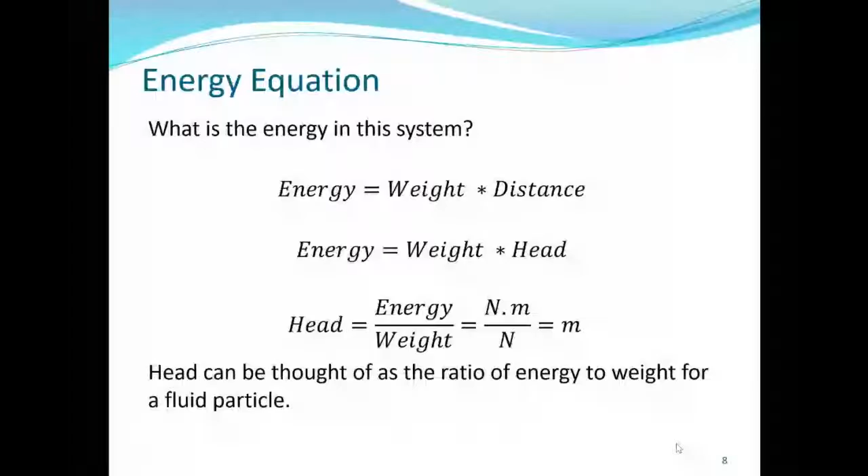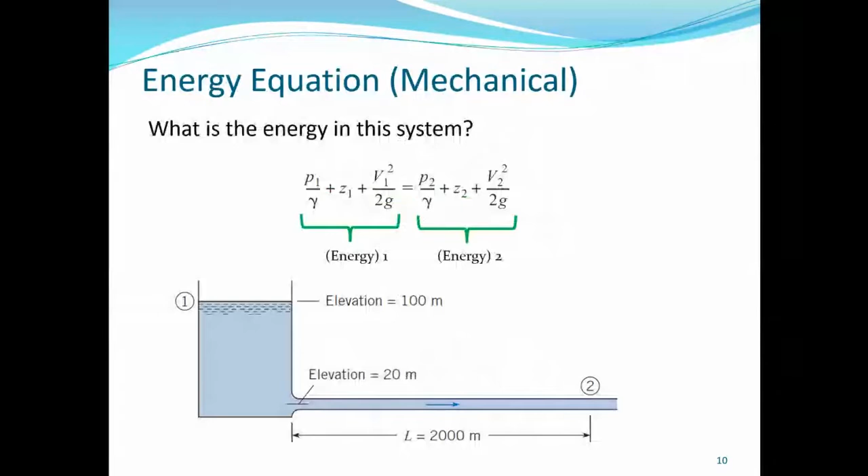Let's continue with the energy equation, which we have started yesterday. The energy equation... this is the Bernoulli equation.

This is the energy equation derived from the first law of thermodynamics. We will not go into so much detail into the derivation because it has a lot to do with thermodynamics, work, and energy, but the full derivation is in the text, which you can always check.

So the energy equation is in a way different from the Bernoulli equation. Their derivations are different, except that the terms are similar.

The energy equation takes care of addition or subtraction of energy and also the head loss due to friction. If you remember, Bernoulli equation is applicable for non-viscous flow, and the energy equation is applicable for viscous flow, because when you have viscous flow, you have friction, and when you have friction, you have head loss as thermal energy. That head loss as thermal energy is taken care of by the head loss term in the energy equation, which is missing in the Bernoulli equation.

Then again, in the energy equation, it takes care of addition of energy by a pump, so this is the pump head, and subtraction of energy by a turbine. While for the Bernoulli equation, when you have a pump or a turbine, you cannot apply the Bernoulli equation because it doesn't take care of addition or subtraction of energy.

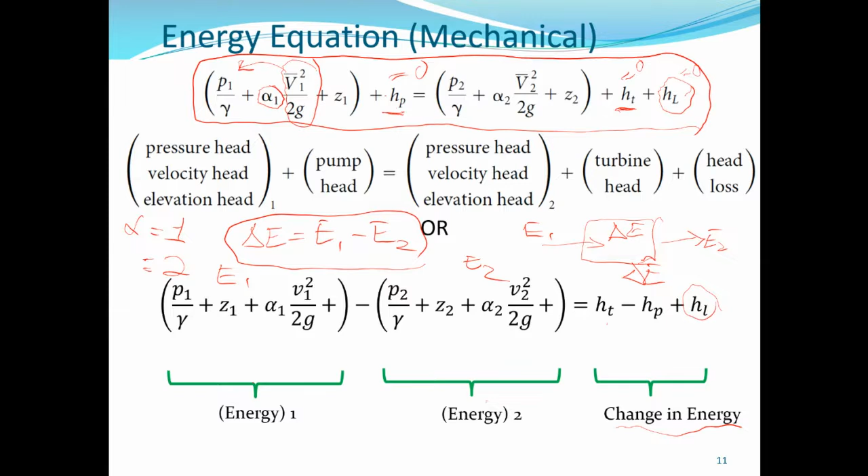So Bernoulli equation involves only mechanical energy, while the energy equation involves mechanical and thermal energy. So this is the thermal energy component, which is simply the heat, which refers to the energy content within a system, which is responsible for temperature.

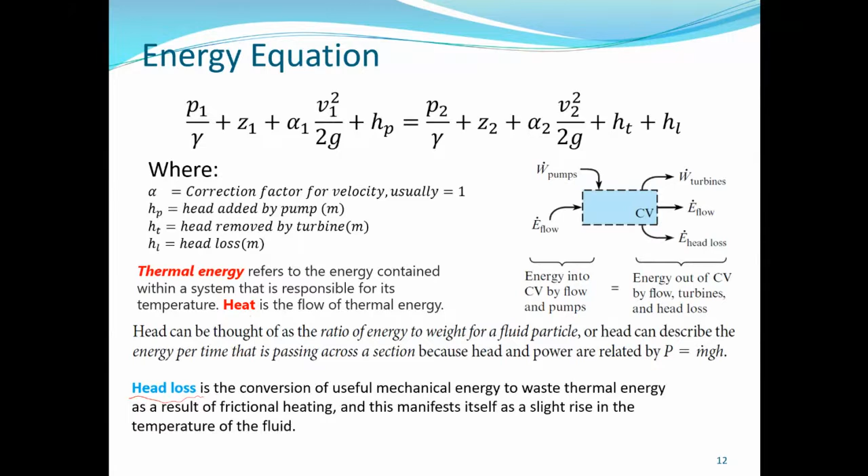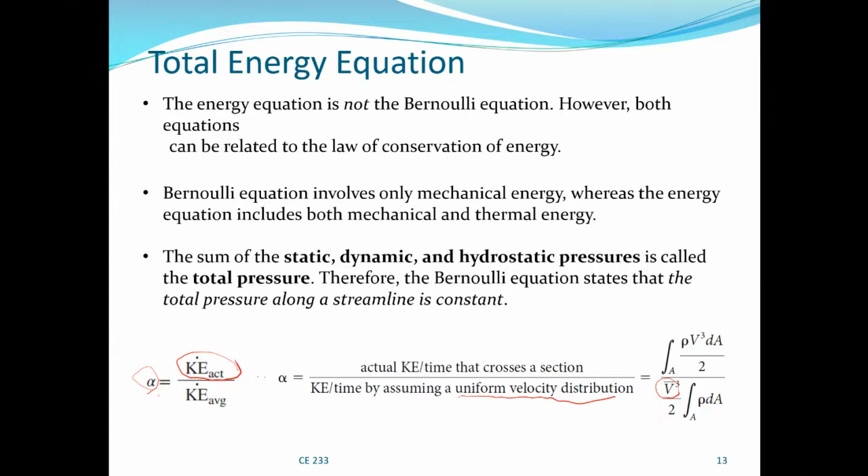Like I was explaining, this is the kinetic energy correction factor, alpha, which is the ratio of the time rate of the actual kinetic energy over the time rate of the average kinetic energy, assuming uniform velocity distribution, which is V bar. So when you multiply this with the kinetic energy, the average will cancel and you'll be left with the actual kinetic energy, which is more or less equal to 1 for turbulent flow. But we apply alpha for the energy equation, not for the Bernoulli equation.

And this is the summary. Alpha equals 1 for turbulent flow, equals 1 for nozzles, and equals 2 for fully developed laminar flow in a round pipe.

And I already explained all these equations before.

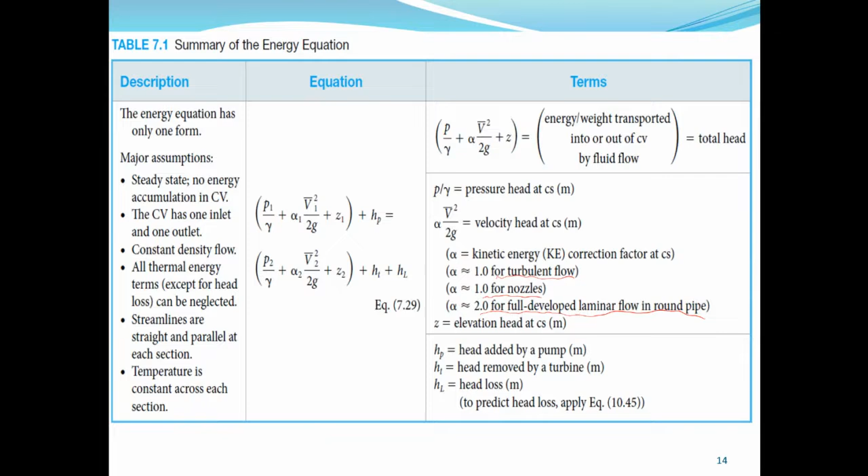Now this summarizes the process of applying the energy equation. You select the energy equation when the problem involves a pump, a turbine, or head loss. More often than not, even if it doesn't involve a pump or turbine, you should always have a head loss, and you have to check to ensure that the assumptions are satisfied.

The assumptions are that you have steady flow, one inlet and outlet port, constant density—that is, the fluid is incompressible—and negligible thermal energy terms, except for the head loss, because the head loss is the one taking care of the thermal energy term.

Then you select the control volume. You label the inlet port section 1 and outlet section 2. By convention, engineers do not sketch the control volume when applying the energy equation.

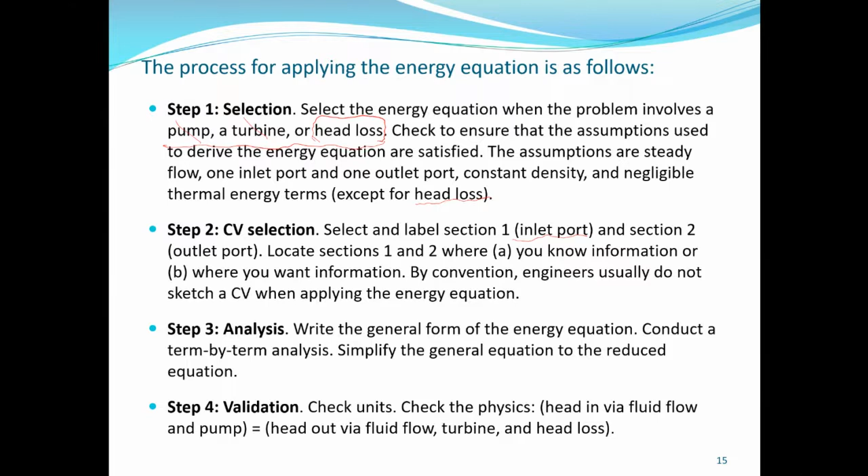In the analysis, you write the general form of the equation and conduct a term by term analysis. You simplify the general equation to the reduced equation, and you have to ensure the units are homogeneous—head in, via flow and pump.

So let's take an example here to demonstrate the application of the energy equation: applying the energy equation to predict the speed of water in a pipe connected to a reservoir.

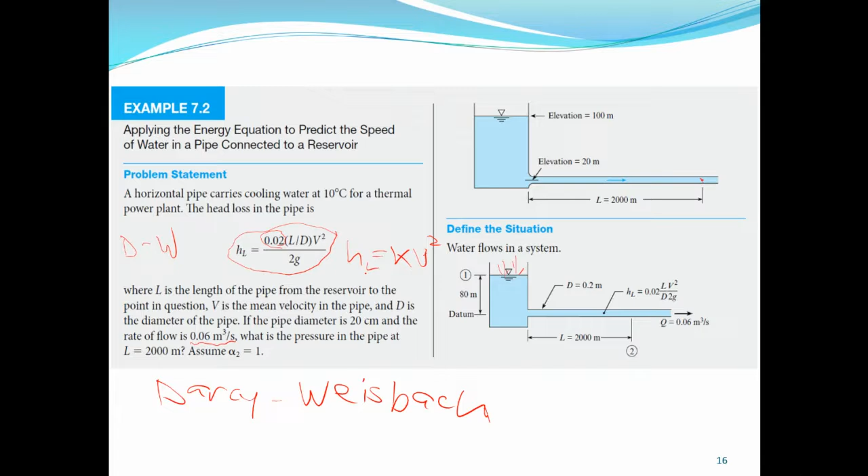It's proportional to the velocity squared, so as the velocity increases, the head loss increases. Also, as the length of the pipe increases, the head loss increases. And based on this, as the diameter decreases, the head loss increases.

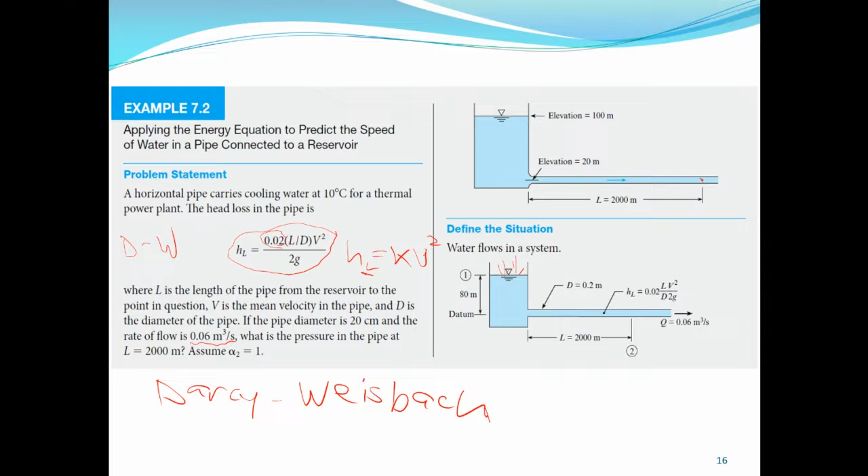Meaning for larger diameter, you have less head loss. For smaller diameter, the head loss is higher. And that is because the flow will be more or less viscous, it will be affected by friction, by shear stress. The shear force will be high.

So here we substitute to find the head loss. And then from there, we substitute back to get P2, because all the terms are known. So we substitute back to make P2 the subject of the formula. And this is P2, which is gauge, in kilopascal.

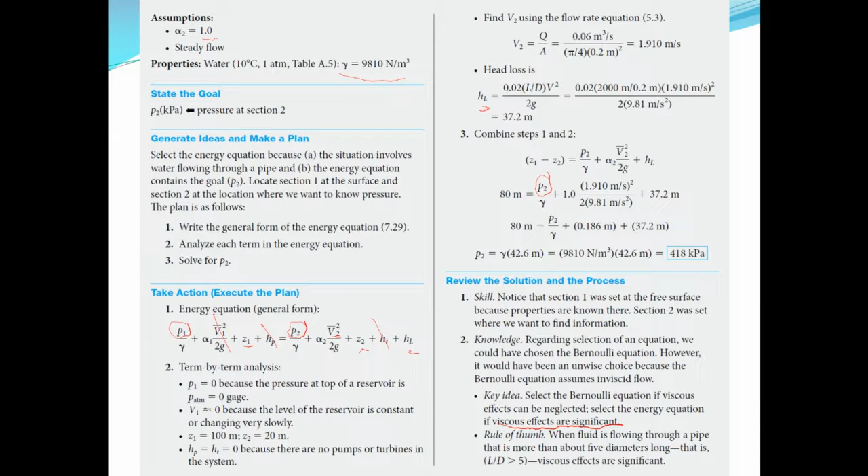So the key idea here: we select the Bernoulli equation if viscous effects can be neglected, and select the energy equation if viscous effects are significant. And how do you know whether they're significant? If you have the head loss. From the question, we were given the head loss, so from there we should know we have to apply the energy equation.

Now, the power equation. Power is simply the rate of doing work, or the rate at which energy is transferred. So how can the pump head and turbine head be useful to us? They will be useful in calculating the power needed by a pump, or the power produced by a turbine, because a turbine produces power, and a pump extracts, utilizes power.

So calculating the power of pumps and turbines, we simply use this formula, gamma Q H. Remember before we wrote that power is m dot g h. What is m dot? It's the rate of mass transfer. And what is mass? Density times volume.

So volume over time, and what is volume over time? Volume over time is Q. So rho Q g h. And what is rho g? That is gamma, rho and g will give us gamma. So gamma Q H. That is how this equation was arrived at from the definition that power is the rate of doing work, m g h over t, so gamma Q H.

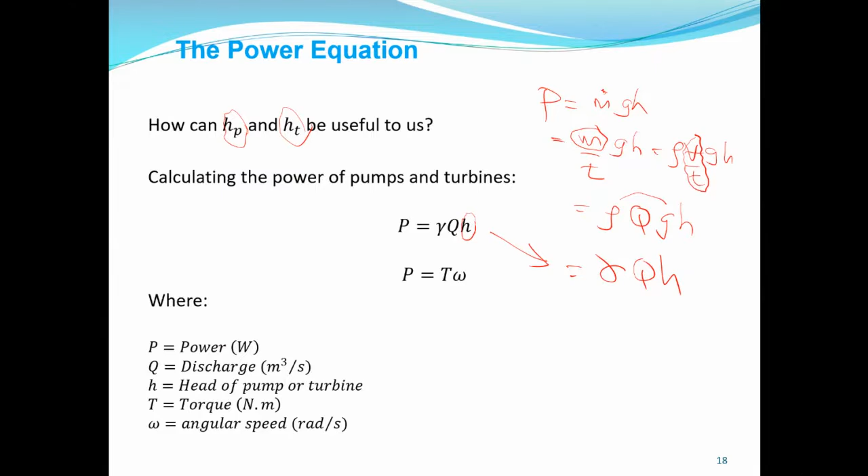So the summary of the power equation: power equals force times velocity. I explained this in our previous class, how we got power to be force times velocity, because power is simply force times distance over time, and distance over time is velocity, so force times velocity. This is most applicable for airplane, submarine, or a car.

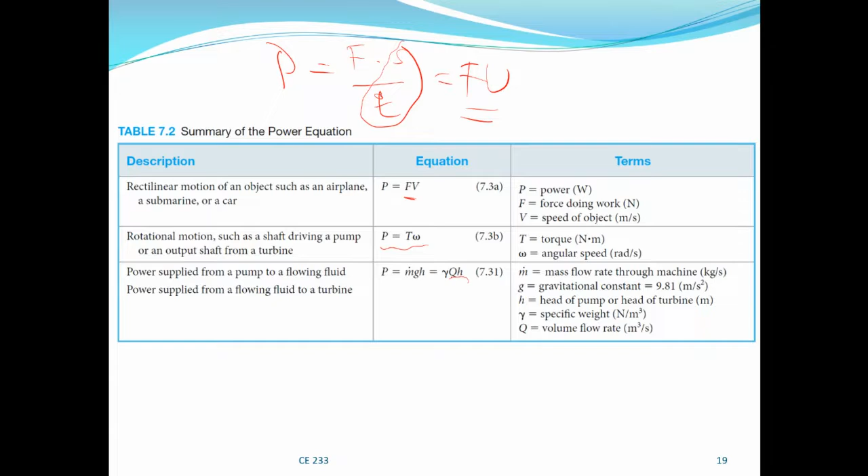And for rotational motion, you have power equal T omega. And the power supplied from a pump to a flowing fluid, and power supplied from a flowing fluid to a turbine, we use gamma Q H. We'll take some examples to demonstrate the application of these power equations.

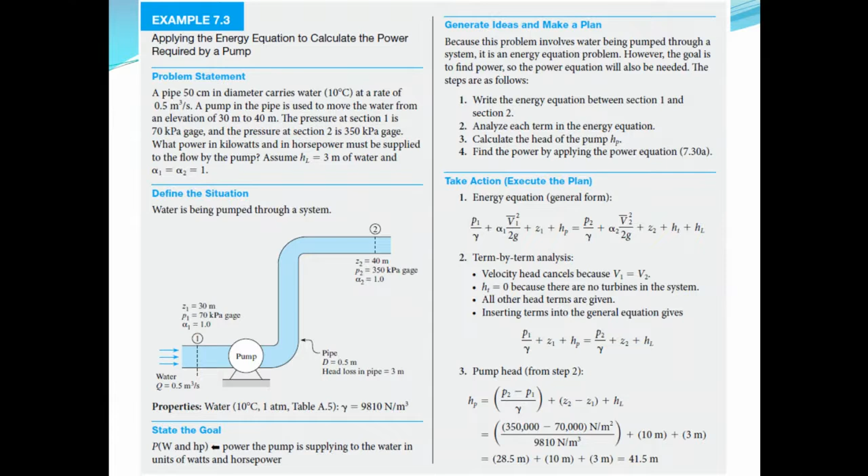This problem says applying the energy equation to calculate the power required by a pump. So power required by a pump means we need to get the pump head and then substitute in the power equation to get the power required. And to get the pump head, we need the energy equation. So this is an overview of the problem. Then the remaining is to plug in the numbers and do the calculations, the mathematics.

Here it says you have a pipe which is 50 centimeters in diameter and carries water at a rate of 0.5 cubic meter per second. And a pump in the pipe is used to move the water from an elevation of 30 to 40. So this is the pump. It's raising the water from the elevation of 30 to 40. So it is increasing the pressure.

It has to increase the pressure in the flowing fluid. The pressure at section 1 is 70 kilopascal gauge, and the pressure at section 2 is 350 kilopascal gauge. What power in kilowatts and in horsepower must be supplied to the flow by the pump? So the power needed by the pump to increase this pressure from 70 to 350.

Assume the head loss to be 3 meters of water, and alpha 1 equal alpha 2 equal 1. So we have a turbulent flow. The head loss is already provided as 3 meters of water.

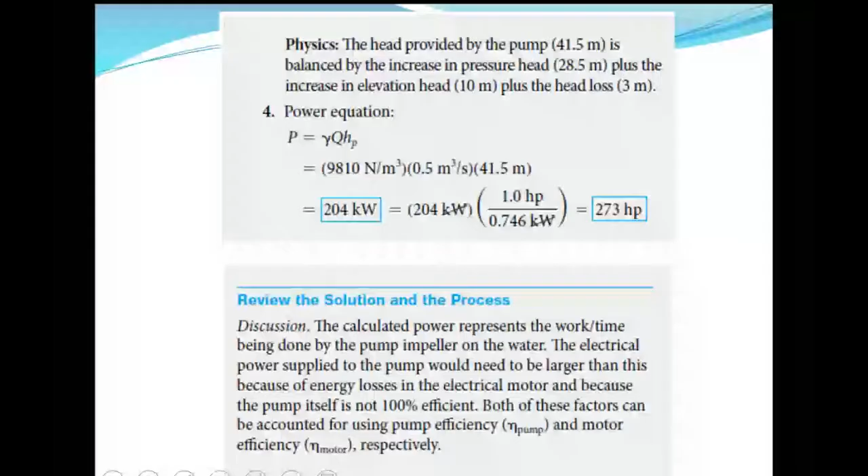So the physics here is that the head provided by the pump, which is 41.5, is balanced by the increase in the head, which is 28.5, plus the increase in elevation, plus the head loss, because the pump is taking care of the head loss. It is taking care of the head loss.

And the power equation, yeah, we have Q, we have HP, we have gamma. This is the power in kilowatts, which we can convert to horsepower. 1 horsepower is 746 watts. So pumps are usually rated in horsepower, which is not the SI unit of power. You can buy a pump rated 1 horsepower, 2 horsepower, 3, like that.

So this is 273 horsepower. So it is really a high capacity pump.

And then the discussion here we have: the calculated power represents the work over time being done by the pump impeller on the water. And the electrical power supplied to the pump will need to be larger than 204 kilowatts, because of energy losses in the electrical motor and because the pump itself does not work 100% efficient. It does not produce this 204. So you need to supply more if you need this output because of the efficiency.

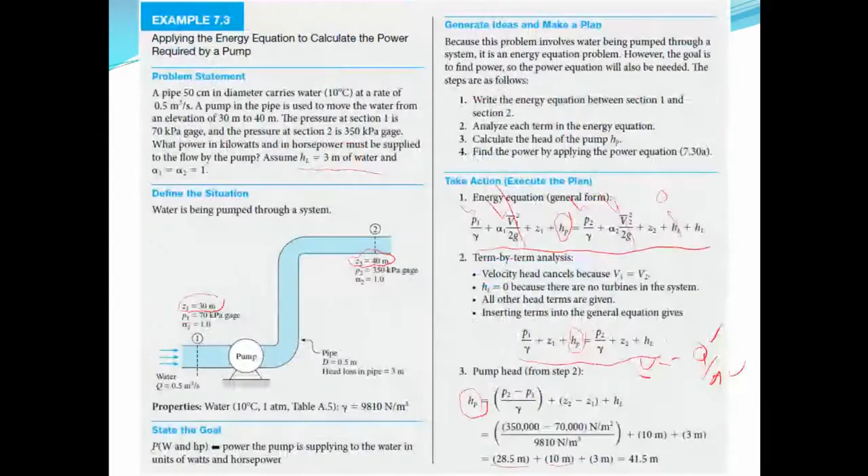Now, can pumps and turbines deliver 100% power? Let me go back and explain something. You see here, what power in kilowatt and in horsepower must be supplied to the flow. We found that the power to be supplied to the flow is 204 kilowatt. This is the power to be output, the power output from the pump.

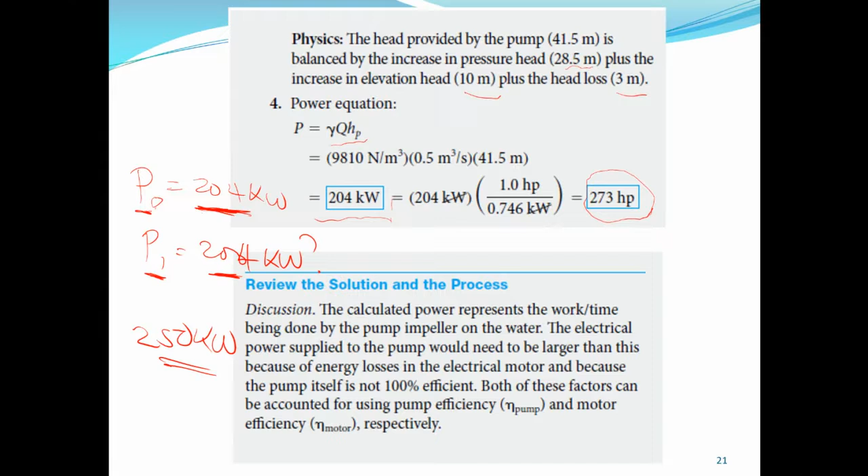Then what about the power input into the pump? Is it 204 kilowatt? No, because when you supply exactly 204, the output will not be 204. It will reduce because of the efficiency. There will be energy losses within the pipings, within the pump system, so it cannot deliver exactly the input power, it has to be less than this. So to maintain 204 output, we have to supply higher, let's say 250, depending on the pump efficiency. Maybe if you supply 250, the pump can produce 204. The output over the input gives the efficiency of the pump, how efficient the pump is at producing an output that is almost the same as the input.

And this is the efficiency. We'll talk about the mechanical efficiency. Can pumps and turbines deliver 100% power? No, they cannot, because there are losses, frictional and thermal losses within the pumps and the turbines, and for that they cannot deliver all the power input that they received.

So pumps and turbines lose... it should be lose, with an E. Let me correct it: pumps and turbines lose some of their efficiency due to some factors such as friction and leakage. And energy losses are accounted for by using the efficiency.

This is eta, pronounced eta, a Greek letter, which is power output from a machine or system over power input to a machine or system. So output over input. Usually the input is greater than the output, so this ratio is usually less than 1, or if you want to make it a percentage, less than 100%, that is when you multiply this by 100%. So the efficiency of a machine is usually less than 1. The closer it is to 1, the better.

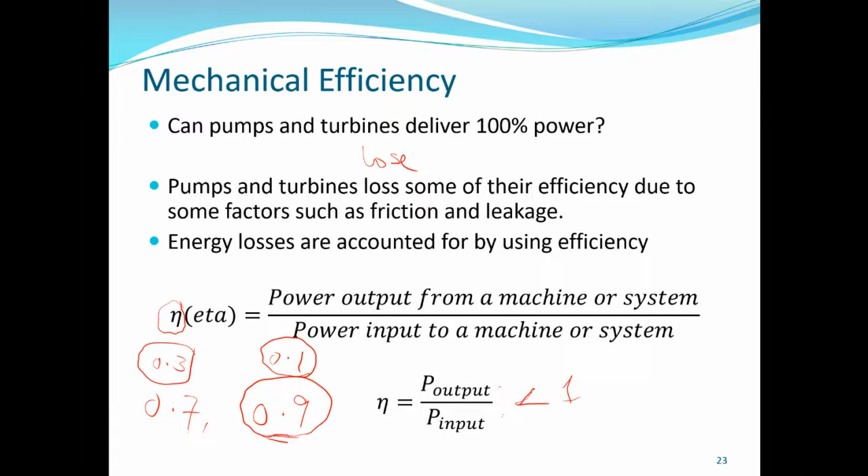Now let's take an example. Suppose an electric motor, like a generator, is drawing 1000 watts of electrical power from a wall circuit, as shown in this figure. The motor provides 750 joules per second, that is also power. Watt and joule per second are the same thing. So the input here is 1000 watts, and the output from the motor is 750 joules per second of power to its output shaft.

So this shaft is connected to a pump, this power drives the pump, and the pump supplies 450 joules per second to the fluid. You can see the original input into the motor is 1000 watts, and the motor produces only 750, it cannot produce 1000 because of the losses. So the output from the motor is 750 to a shaft which turns a pump, and then the pump produces 450. It receives 750 but produces only 450.

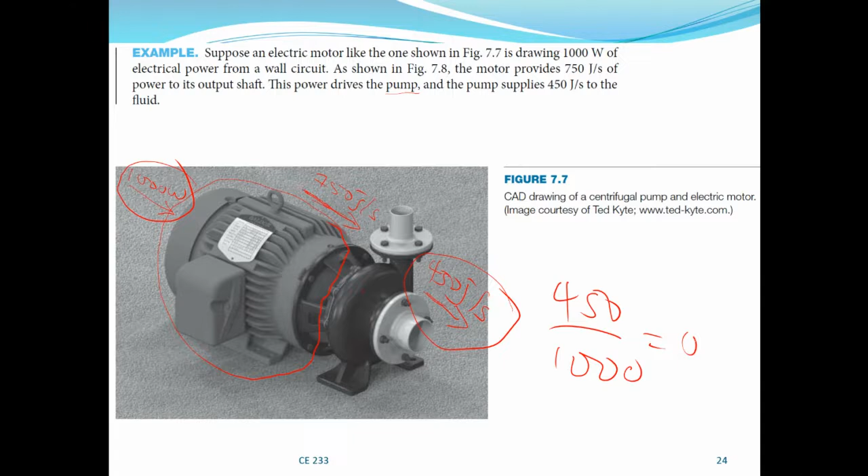So how can we find the overall efficiency here? The overall efficiency, or the combined efficiency of the system, is the final output over the initial input, which is 450 over 1000, so that is 0.45 or 45% efficient. This is the combined efficiency, combined because it includes the efficiency of the motor and the pump. For the motor alone, the efficiency is 750 over 1000, that is output from the motor over the input into the motor, which is 75%.

And the efficiency of the pump is 450 over 750. Okay, 450 over 750, which is 60%. Okay, 60% efficient. But the combined efficiency now is 45%.

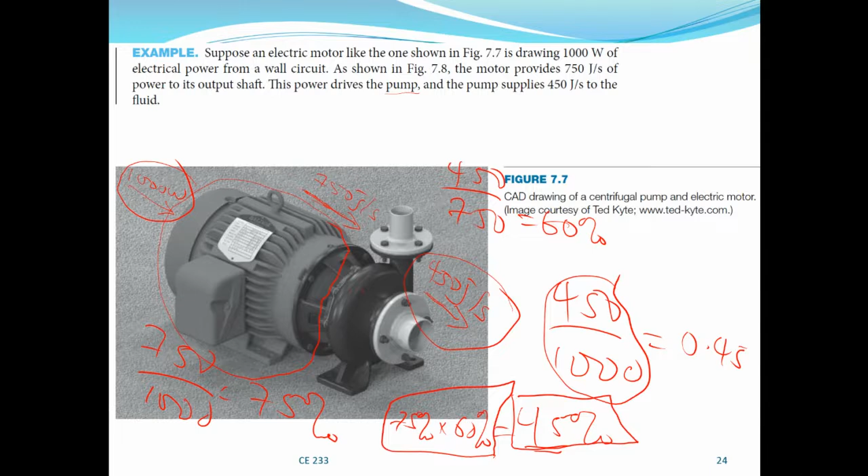And this 45% can be obtained by multiplying the efficiency of the motor and that of the pump. So this is simply saying it's equal to 75% times 60%. When you multiply the efficiency of the motor and the pump, you get the combined efficiency. Or when you consider the final output over the initial input, it will also give you the same answer. And this is exactly what we have.

From the electrical grid, it takes 1000 watt or joule per second into the electric motor, and the electric motor produces 750 into the pump, and the pump produces 450 to the flowing fluid. So the efficiency of the motor is 750 over 1000, 75%. The efficiency of the pump is 450 over 750, which is 60%, and the combined efficiency is the final output over the initial input, which is 45%.

And this, like I said, the combined efficiency is simply the efficiency of the pump times the efficiency of the motor. Which is 60% times 75%. When you multiply this out, you get 45%. Okay, I hope it is clear.

Now this is the summary of the efficiency equation. When you have a pump, it's the efficiency of the pump times the power received by the shaft, because a pump has a shaft which is rotating. So the power that is supplied to the pump shaft, and the pump power is m dot gh, or this. And for a turbine, the power of the shaft is equal to the efficiency of the turbine times the power received by the turbine.

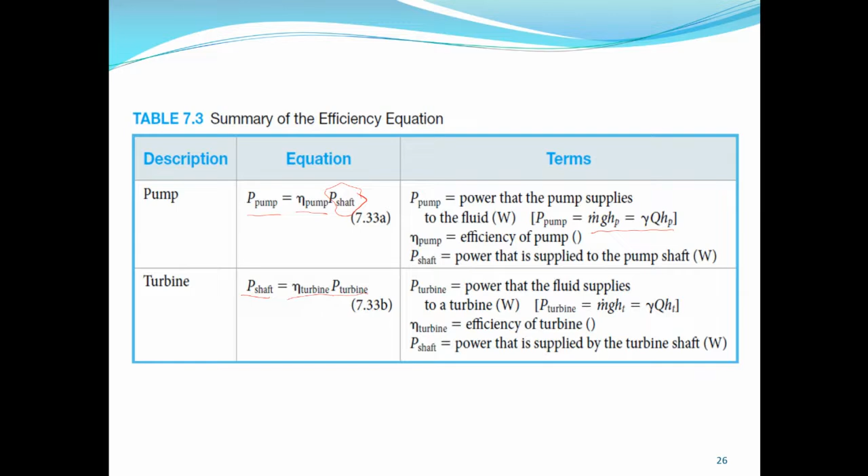So let's take an example here and demonstrate the application of the efficiency equation. Here we'll apply it to the energy equation to predict the power produced by a turbine.

At the maximum rate of power generation, a small hydroelectric power plant takes a discharge. This is a turbine. You can see this is called a penstock, which is a large diameter pipe conveying water from higher elevation. You can see the elevation here is 0, this is 61, which is very high. And this is a dam, and this is a reservoir, so the water is transferred, so it has a lot of energy to turn the turbine, and the turbine is connected to an electric motor which produces electricity.

So here you have the flow rate 14.1 cubic meters per second through an elevation of 61 meters, and the head loss through the intakes, penstock, and the outlet works is 1.5 meters. So this is the combined total head loss, and the combined efficiency of the turbine and electrical generator is 87%. What is the rate of power generation?

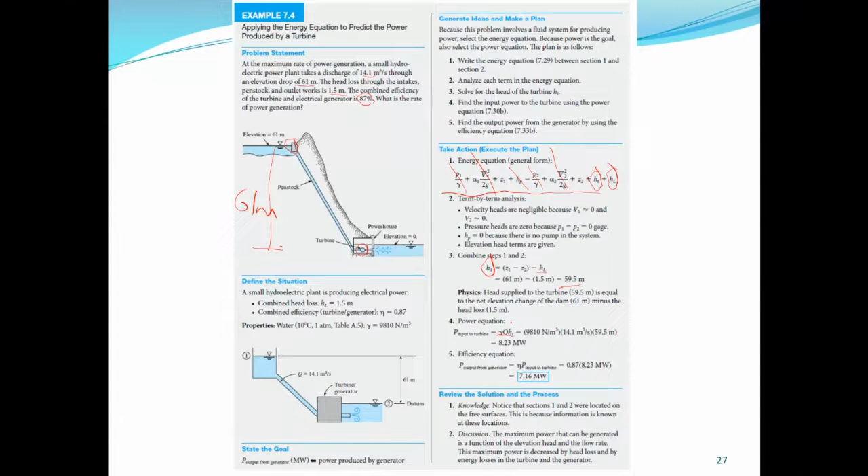What about the power output? Here it asks for the rate of power generation, which is the power output from the turbine, not the input. The turbine receives 8.23 megawatt from the flowing fluid, but can it produce this amount? No, it has a combined efficiency of 87%, which is the efficiency of the turbine and the electrical generator. So it can only produce 87% of 8.23. The power output from the generator equals the efficiency times the power input, because efficiency, eta, is the power output over the power input.

So power output is simply the efficiency times the power input, and the power input is the power received from the flowing fluid, which is 8.23. So this is now the power output, 7.16 megawatt.

Here the maximum power that can be generated is a function of the elevation head and the flow rate. You can see, because P equals gamma Q H turbine. So it's a function of the turbine head, which is a function of the elevation head, and the flow rate.

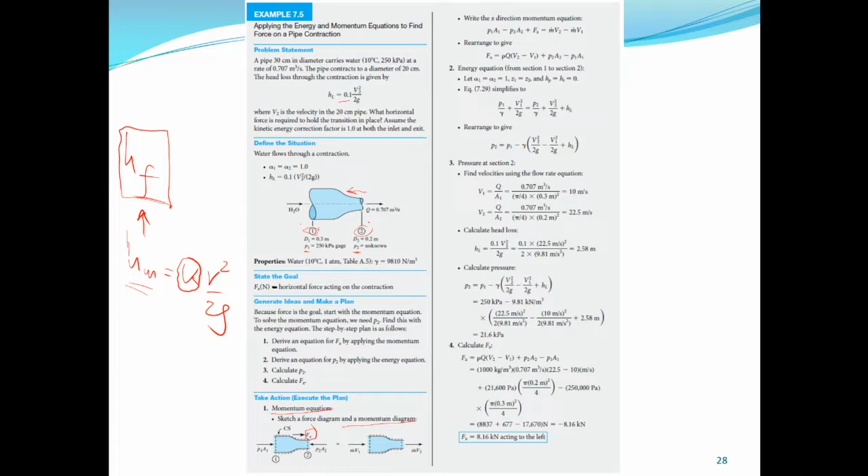And then we have Fx, and then we have the momentum equation. This is the inlet and this is the outlet. The initial momentum and this is the final momentum.

When we write the X-direction momentum equation, summing all the forces: positive, negative, positive, positive. This equals the rate of change of momentum. The sum of all external forces includes the pressure force and the force needed to hold the contraction in place.

Applying Newton's second law of motion, summation Fx equals the rate of change of momentum, which is m dot v.

Here v1 is different from v2. Because of the contraction, v2 will be greater than v1, so the flow will be accelerated. According to Euler's law, minus del P equals rho A. If it is accelerated, the pressure gradient upstream will be higher, because this is now the direction of acceleration, so the pressure gradient is higher here.

Based on the piezometric equation, Pz plus the velocity head, based on the Bernoulli equation, equals constant. Because the velocity increases, the pressure has to decrease. So all these indicate that P2 will be less than P1.

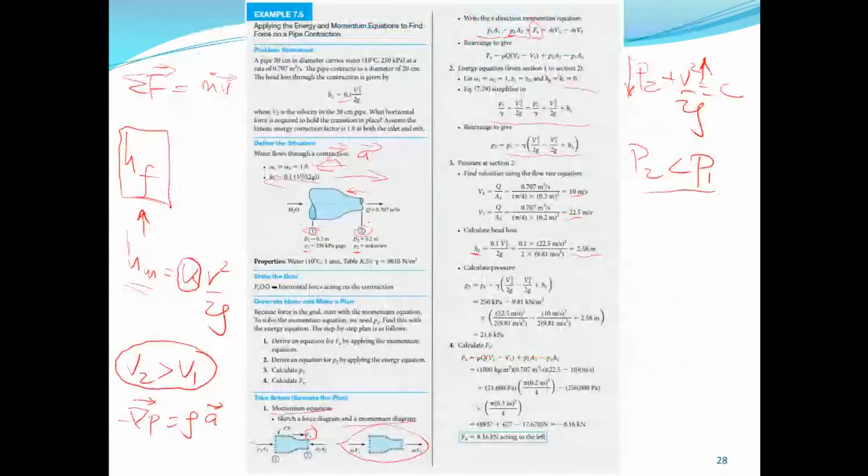Now we can find the head loss using V2, which is 2.58. Then we substitute in the energy equation to find P2, which is 21.6. What is P1? P1 is 250. You can see that P2 is less than P1.

Even without finding it, you should know that if you get, say, 300, you're definitely wrong because it should be less. It has to be less than P1 because of the increase in velocity and the acceleration of the fluid particles.

Once we got P2, we can simply go back and substitute to get Fx, because V2, V1, P1, and P2 are all known. So we just substitute to get Fx, which is minus 8.16 kilonewton. The minus means it is acting to the left because we assumed it was acting to the right, so it's actually acting this way. Simple.

Because the magnitude of a vector quantity is always a positive number, it's always positive. So when you have a minus sign, it's just about the direction.

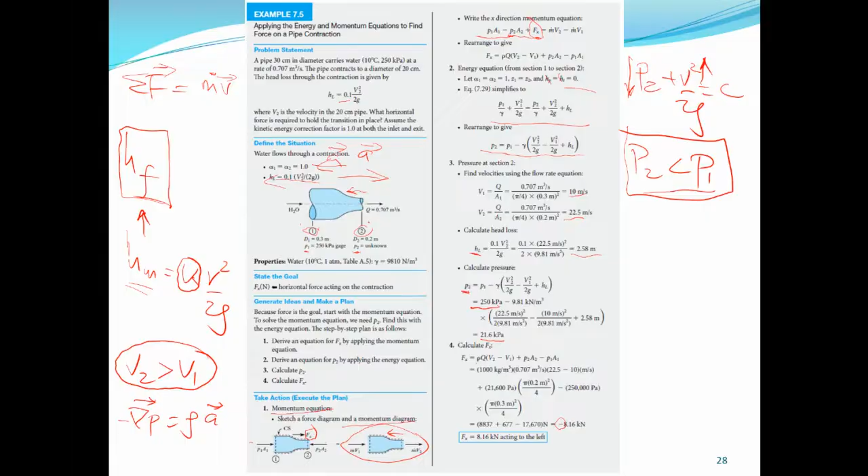I've started contrasting the Bernoulli and energy equations at the beginning, but here are some more points to help you out. The Bernoulli equation and energy equation are derived in different ways. We know the Bernoulli equation was derived from Newton's second law, integrating the resulting equation along a streamline by applying the acceleration of the particle.

While the energy equation was derived from the first law of thermodynamics and then using the Reynolds transport theorem. So even the derivations are different, and consequently, the Bernoulli equation involves only mechanical energy.

This I explained already. Whereas the energy equation involves both mechanical and thermal energy. The thermal energy is in the form of head loss, which is the term constituting thermal energy, and this is zero in the case of the Bernoulli equation.

So the two equations have different assumptions, and they differ mainly in the viscous effects. In the Bernoulli equation, the viscous effects are negligible, hence it applies to the inviscid region. The energy equation takes care of the viscous effect, so it applies to the viscous flow region, because that is when you have head loss due to friction. Also, the Bernoulli equation does not account for any additional energy being added through a pump or extracted through a turbine.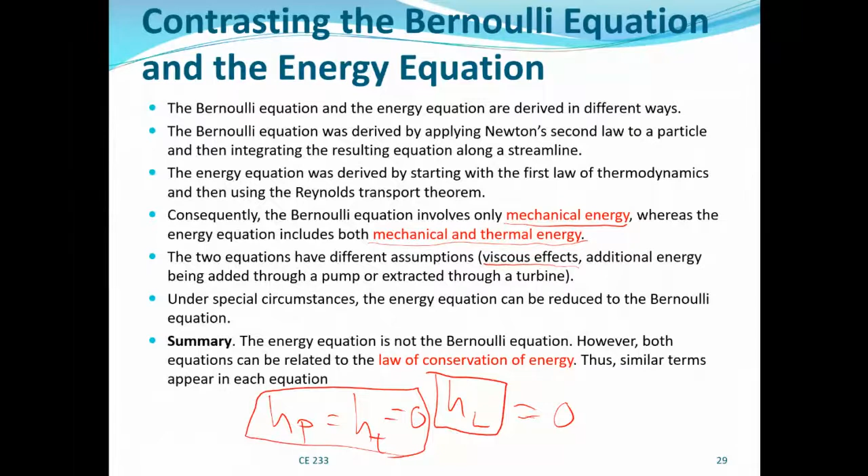And the grand summary is that the energy equation is not the Bernoulli equation. However, both equations can be related to the law of conservation of energy, because the Bernoulli equation is simply the law of conservation of mechanical energy, while the energy equation is the general conservation of energy, not only mechanical, since thermal energy is not mechanical energy. So it involves non-mechanical energy, and that is why you have similar terms appearing in each of the equations. This is very important for conceptual understanding of the two equations.

So now we'll move on to the energy heads and the explanation of the energy grade line and the hydraulic grade line. We'll look at how to sketch the energy grade line and the hydraulic grade line. We'll take a few minutes break and I'll come back.

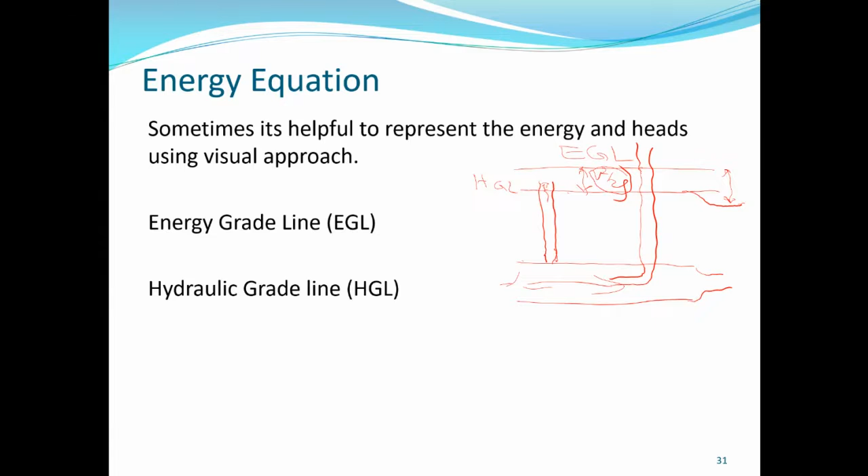So we'll itemize the steps it takes in drawing the hydraulic grade line and the energy grade line. The energy grade line is simply a line that indicates the total head at each location in the system, and recall that the total head characterizes the energy as discussed in the previous lecture.

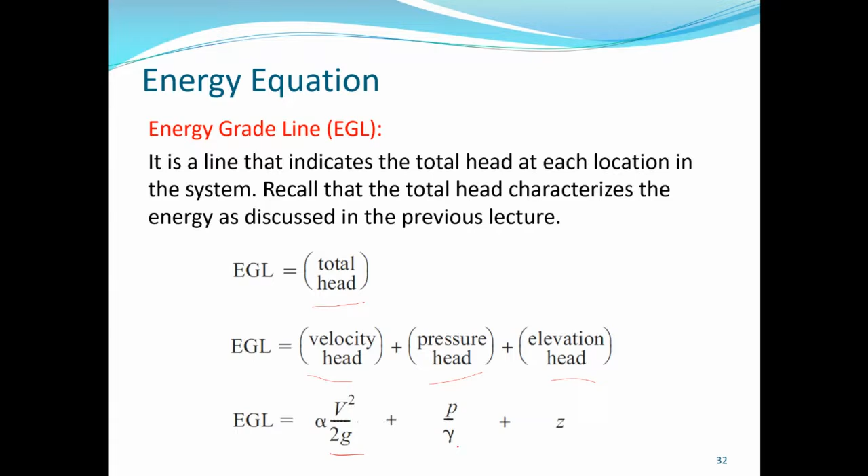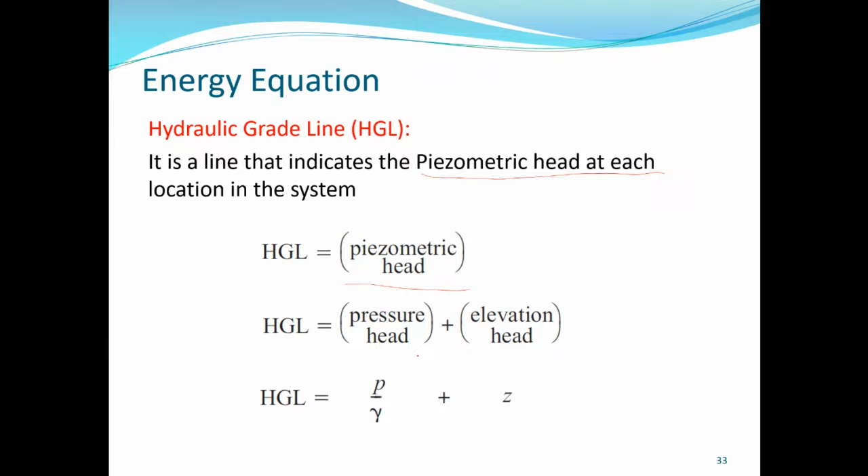The total head excluding the losses. So the energy grade line is the total head, which is the velocity head plus pressure head plus elevation head, without the losses. And the hydraulic grade line is simply a line that indicates the piezometric head at each location. The piezometric head is the sum of the pressure head and the elevation head, so together they give the hydraulic grade line.

Because the hydraulic grade line gives piezometric head, the hydraulic grade line will be coincident with the liquid surface in a piezometer, while the energy grade line will be coincident with the liquid surface in a pitot tube. This is because the pitot or stagnation tube measures the velocity head, while the piezometer does not measure velocity head. It measures only the piezometric head, specifically indicating the pressure head in the pipeline.

So this is now indicating the pressure head. And when you look at the elevation, it gives the piezometric head. But ideally, when you have this tank at this point, the pressure head according to the Bernoulli equation should be the same. When you have a piezometer here, the pressure head should be the same according to the Bernoulli equation, although it will slightly drop because of the velocity head.

So this will be the velocity head. So to take care of the velocity head, here will be the pressure head, and the total, because of the velocity head, as it is flowing it has velocity head. So the total should add up to the height in this case. This is according to the Bernoulli equation.

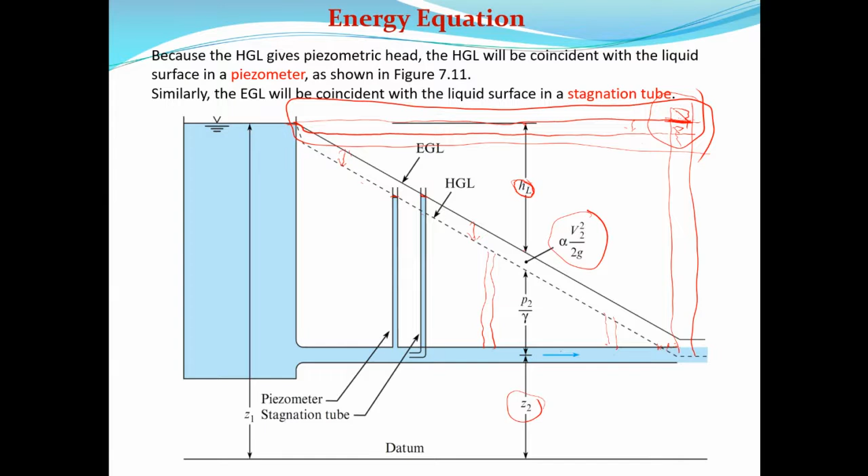So how do we draw this? We have some drawing tips here which we'll take one by one. In a lake or reservoir like this one, where water is static, the HGL and EGL would coincide with the liquid surface. So at this point, when it is static, it will coincide. It will indicate the piezometric head.

And why will they coincide? Because the velocity is zero. Hence the energy grade line will coincide, and the static or gauge pressure is also zero, so it will just coincide with the liquid surface here, the energy grade line and the hydraulic grade line, because the pressure is zero and the velocity is zero.

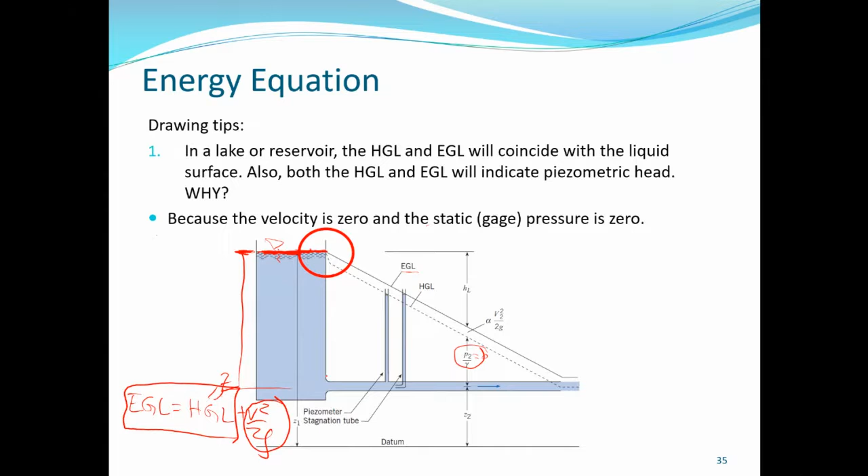So this is at this point, exactly this point, before the water gets into the pipe. Now, a pump causes an abrupt rise in the EGL and HGL by adding energy to it. We say that pumps have a pump head, which it imparts on the water.

So if this is the pressure head, when it goes through the pump, it gets a boost, an abrupt rise in EGL equal to HP. So there is a rise in the energy grade line equal to the hydraulic head, which is equal to the head of the pump. So the EGL and the HGL will both rise by an equal amount equal to the pump head. So at this point, when you have a pump, there is a rise in the pressure head, you can see from here to here.

And then it continues to flow, and because it will be losing head, that's why it is sloping down. The slope of the energy grade line we usually call SF, friction slope, and the slope of the hydraulic grade line we call SW, because normally we have the water slope. The slope is normally given as the head loss over the length of the pipe, the head loss occurring per unit length of the pipe. This we will discuss also probably in chapter 10.

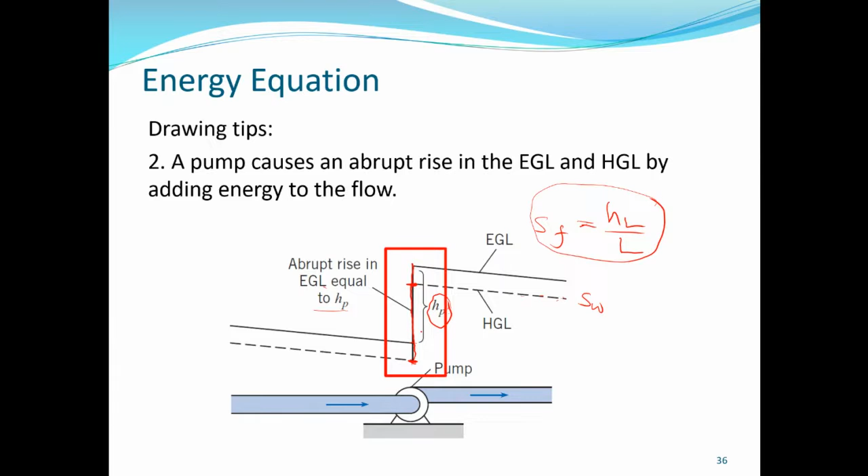So this is the rise. And then again, when you have a turbine, there will be a drop in the EGL and HGL because a turbine removes energy from the flow. So here, when you have a turbine, this is the EGL and HGL. Here you have a turbine, it drops the energy level, the pressure head, because the turbine extracts the energy, utilizes the energy from the moving fluid. So this is the head due to the turbine.

Also, a component that generates a significant frictional effect, such as a valve, causes a sudden drop in both EGL and HGL at that location. When you have a valve, you will have a drop in the energy level. When you have a valve, when you have a contraction, or when the pipe contracts, there is energy loss, so it will be reduced. But when you have a valve, there will be a sudden reduction in the energy in the EGL and HGL.

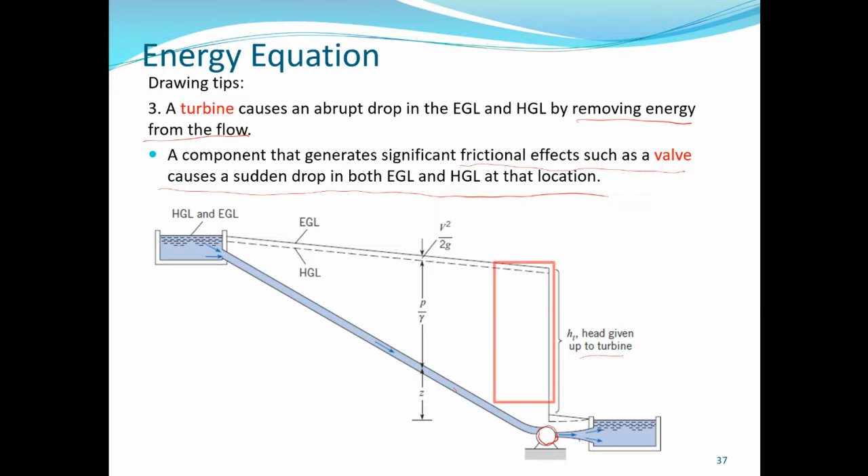And then for steady flow in a pipe of constant diameter and wall roughness, the slope delta HL over delta L of the EGL and the HGL will be constant. So this slope, the head loss per unit length of the pipe, will be constant when you have constant diameter and wall roughness. So if it will be constant, it means they will be parallel, so this will be parallel to this one.

This is because the velocity is assumed to be the same. Here the velocity of flow is the same, that is why we say for steady flow, meaning the velocity at a given section does not change. So it will be more or less parallel, and the difference between EGL and HGL will be given by the velocity head.

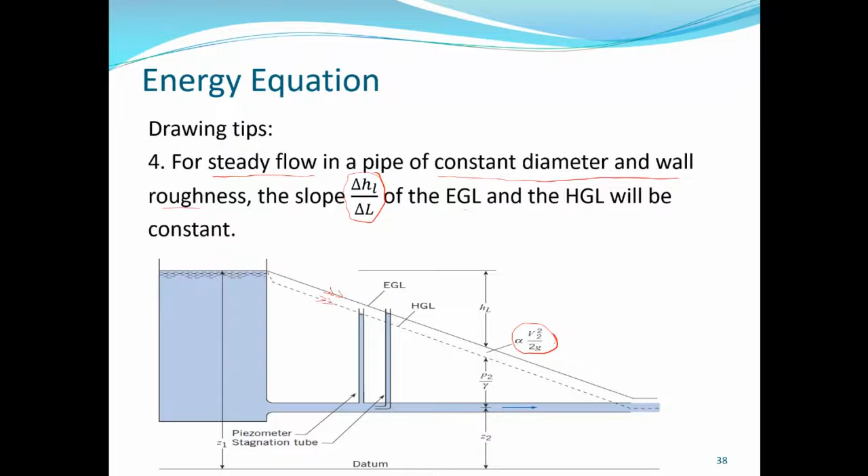And tip number 5 is locate the HGL below the EGL by a distance of the velocity head. This we know, HGL is always below the EGL by a distance of the velocity head. These two curves approach each other as the velocity decreases, and they diverge as the velocity increases. Let's assume, we will indicate this in another diagram. They come closer together, meaning the distance between EGL and HGL reduces if the velocity reduces, and the distance between HGL and EGL increases if the velocity increases.

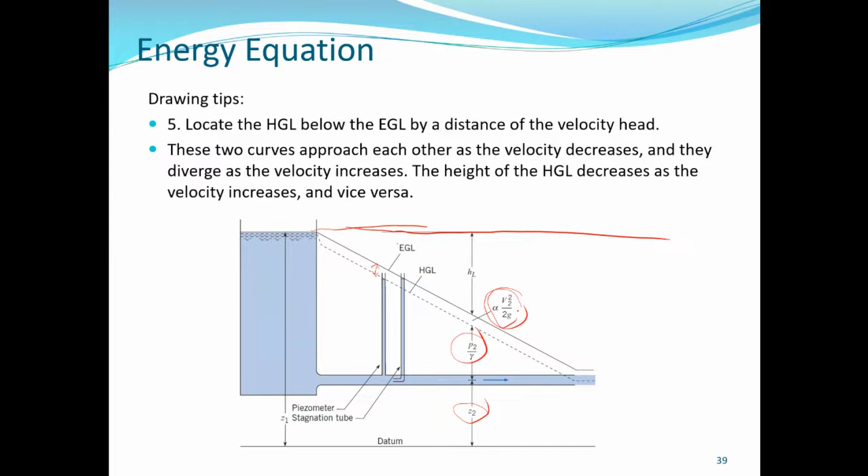This is for idealized Bernoulli type flow, which is horizontal. In the real flow, it's not horizontal - the energy grade line is not horizontal. What is horizontal is the total head, which is called the total head energy grade line. The total energy is the sum of the elevation head, the pressure, the velocity head, and the head loss. So it's the total energy that will always remain horizontal, because it is taking care of the losses.

For open channel flow, the hydraulic grade line coincides with the free surface of the liquid, and the energy grade line is a distance above it. So when you have open channel flow, let's say in streams and rivers, the water surface gives the hydraulic grade line.

The top is zero because the static pressure is zero due to atmospheric pressure, but you have the elevation head. So this is the hydraulic grade line, and the energy grade line is a distance above it because of the velocity head - a distance v squared over 2g above the free surface. This is for open channel flow, where the HGL coincides with the liquid surface.

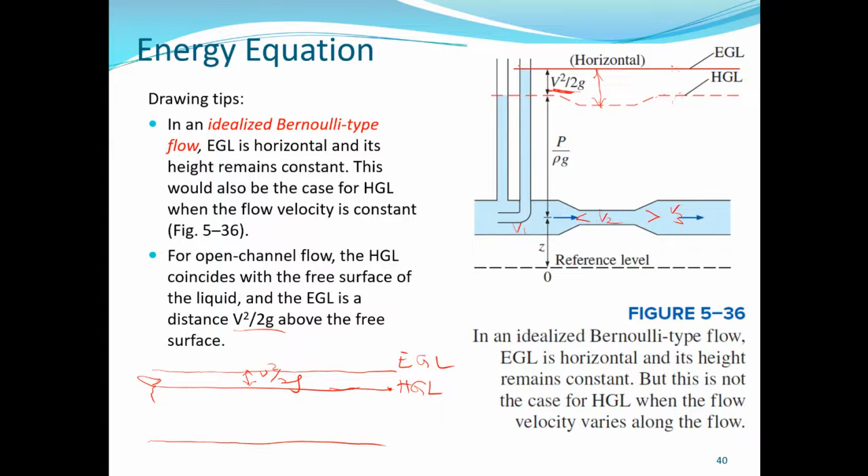Now, the height of the EGL decreases in the flow direction unless a pump is present. So the energy grade line always decreases in the flow direction, as well as the HGL - they always decrease in the flow direction, except for idealized Bernoulli flow, where it is horizontal. But for actual real flow, it is decreasing in the flow direction unless a pump is present.

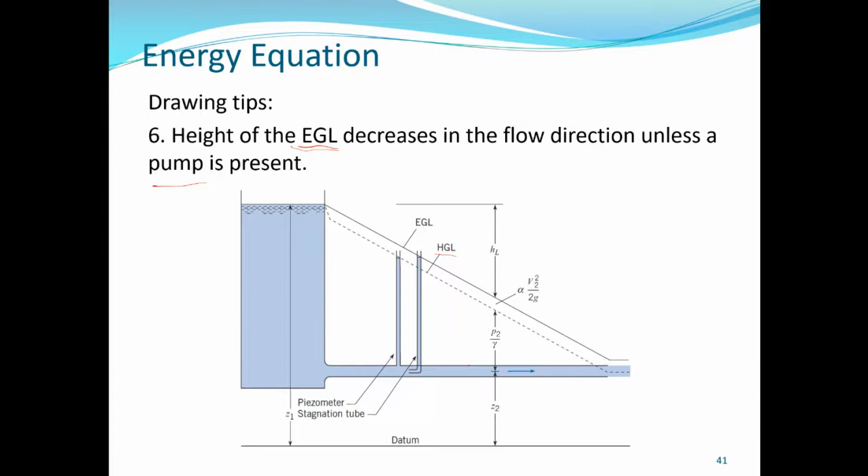When you have, let's say, a pump, that is when it will increase the energy grade line. Or when you have a turbine, it will decrease it further - suddenly there will be an abrupt reduction.

When a pipe discharges into the atmosphere, the HGL is coincident with the system because the pressure head is zero. You see here, it is discharging into the atmosphere, and there's atmospheric pressure active, which makes the pressure head to be zero. So in this case, the HGL is coincident with the system.

So here the hydraulic grade line will just be within the center line of the flow, and there will be a difference - the velocity head will increase because the diameter of the conduit decreases, so v increases. When v increases, the velocity increases at that point, and that's why the difference between HGL and EGL has increased.

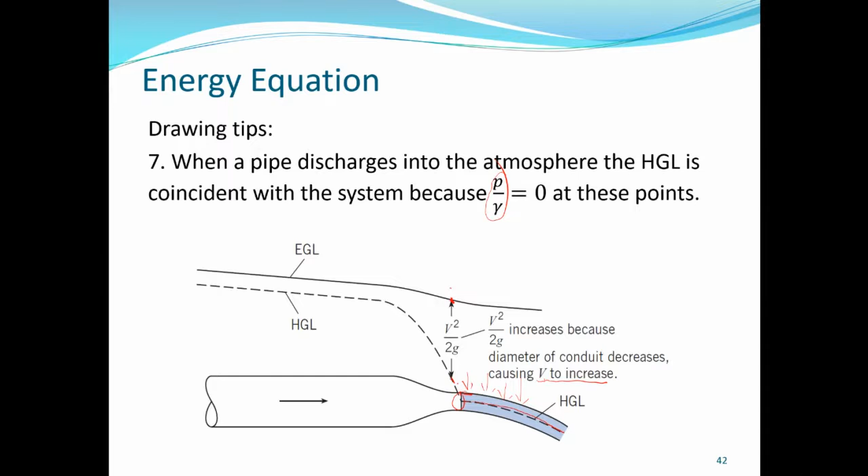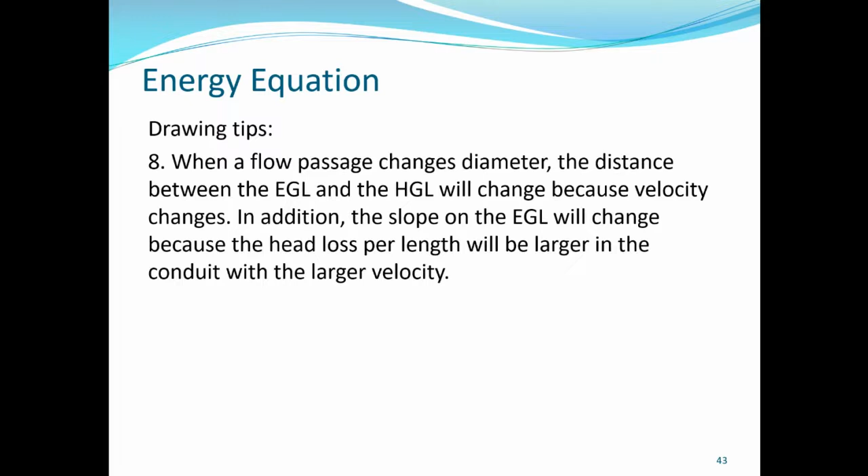When a flow passage changes diameter, the distance between the EGL and HGL will change because velocity changes. In addition, the slope on the EGL will change because the head loss per unit length will be larger in the conduit with the larger velocity. When you see the pipe diameter changes, the velocity V2 is greater than V1, and that is why at this point the velocity head increases because the velocity has increased.

So larger velocity head because of smaller pipe, and steeper energy grade line and hydraulic grade line because the head loss is more - the higher the velocity, the higher the head loss. The head loss is a function of the energy grade line, because the energy grade line SF is the head loss per unit length. So if this increases, it means the slope, which is SF, will also increase - that's why it becomes steeper.

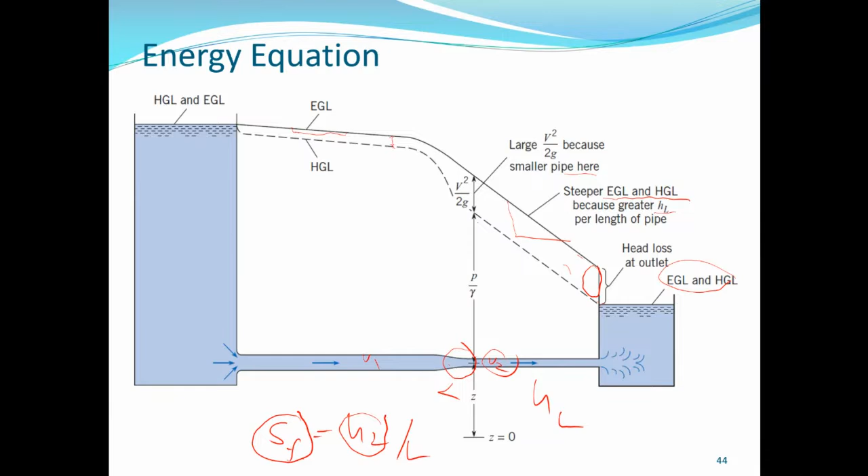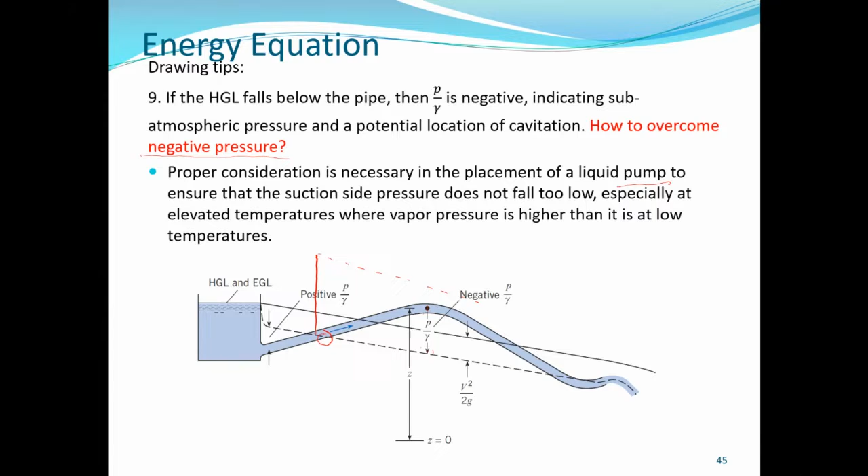And this is another one which shows, you can see it at the entrance, here is the same EGL and HGL, but then it decreases because of the entrance. The velocity head increases here because of the flow velocity.

At this point, let me call it V1, let me call this V2, because V2 is less than V1. That is why at this point the velocity head decreases, because the velocity has decreased. And then it remains almost the same, but there is always loss. It is losing head. There's always head loss.

And here again, you can see, because the velocity here is higher, the slope of the energy grade line is steeper than the slope here, because V2, the velocity at section 2, is less than the velocity at section 1. That is why the energy gradient is steeper here, because the velocity is higher, hence the head loss is higher here also. The head loss is also higher in this case, because the head loss is a function of the velocity head.

Energy gradient cannot increase in the flow direction unless energy is supplied to the fluid. That is, unless, let's say, you install a pump here, so it will push the energy grade line and the hydraulic grade line up when you have a pump. Otherwise, it does not increase in the flow direction.

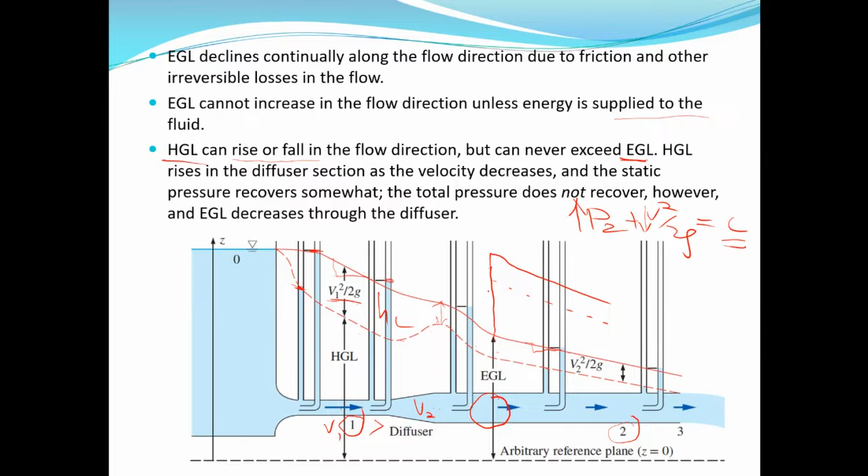And here in both cases, you have a piezometer and a pitot tube. The piezometer shows the height of the pressure head in the pipe, or the piezometric head, and the pitot tube shows the total energy, which is the stagnation energy, or the total head, including the velocity head. You can see that.

Now let's take a simple example here before we take our quiz on how to draw the energy grade line and hydraulic grade line in a pipe system. So, sketching the EGL and HGL for a piping system, here you have a pump.

There's a pump that draws water from a reservoir where the water surface elevation is 520 feet, so Z1 is 520 feet, and forces the water through a pipe which is 5,000 feet long and 1 foot in diameter. This pipe discharges water into a reservoir with elevation of 620 feet, so the difference in elevation is 100 feet. The pump is raising water through a height of 100 feet, which is 30 meters. The rate of flow is 7.85, and the head loss in the pipe is given by this equation.

That's the Darcy-Weisbach equation. We want to determine the head supplied by the pump, the power supplied to the flow, and draw the HGL and EGL for the system. Assume that the pipe is horizontal and is 510 feet in elevation.

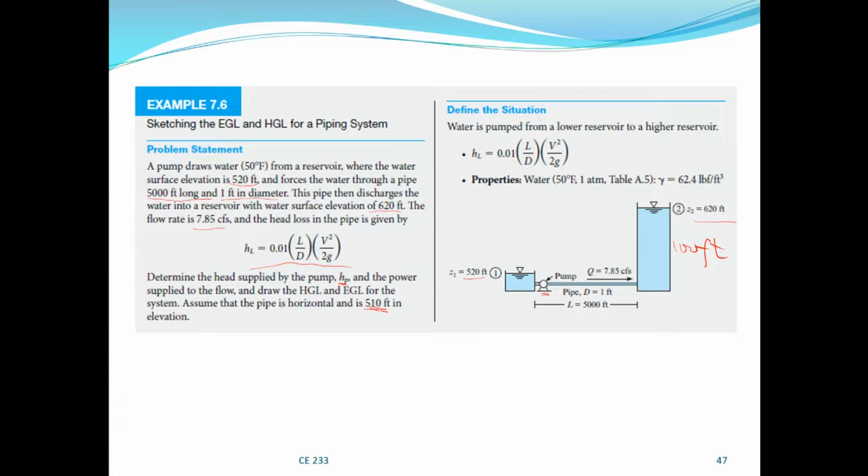So we need to find HP. We simply apply the energy equation to find the head due to the pump. We don't have a turbine, so that term is 0. And the head loss, we were given the equation to find it.

Because these are reservoirs, the pressure in both cases is 0, since it's atmospheric at the top, and the velocity is 0. So the head of the pump is equal to the difference in elevation plus the head loss. The head supplied by the pump provides energy to lift the fluid to a higher elevation and to overcome the head loss. That's the interpretation.

Now we find V, the velocity, because we have the flow rate and the pipe details. So this gives us the velocity, and then we can find the head loss. Knowing the diameter, length, and velocity, we calculate the head loss, and then find the head supplied by the pump, which is 178.

To find the power, we just substitute the pump head here and get the power, which is converted to horsepower, giving 159 horsepower. So how do we now sketch the energy grade line and hydraulic grade line?

Here we have the energy grade line. The pump provides a head of 178, so it pushes the energy grade line up by 178, and then it keeps reducing up until it enters the reservoir. So this is simply the sketch.

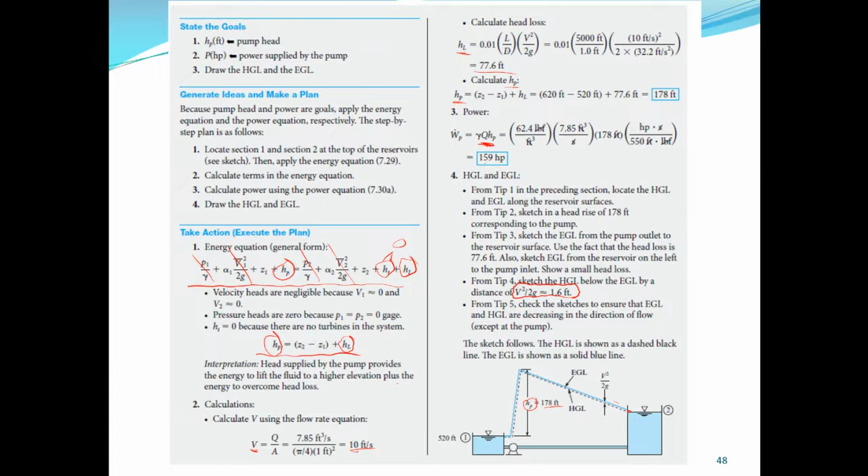What is the velocity head? We can determine it by plugging in the value of the velocity, and this gives us 1.6 feet, which is the difference between the EGL and HGL. This difference remains largely constant because the velocity can be assumed uniform throughout the pipe, giving the velocity head. Any questions?

It's time for the quiz now, and this is the end of chapter 7. Next week we will take chapter 10, flow in conduits, that is pipe flow.